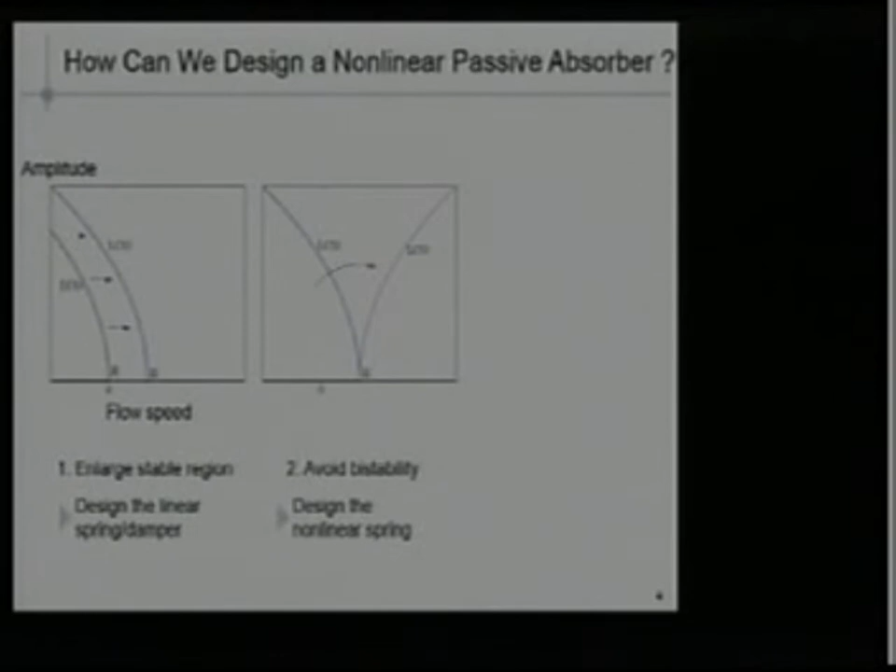And then the last objective of the absorber is to reduce the amplitude of limit cycle oscillation. So even in the case where we are unstable and have this self-excited vibration, we want to keep this vibration small in order not to create too much damage. Unfortunately, with our absorber, we don't have freedom left to target this objective, but I will show that targeting the first two still gives quite a good result with respect to the third one.

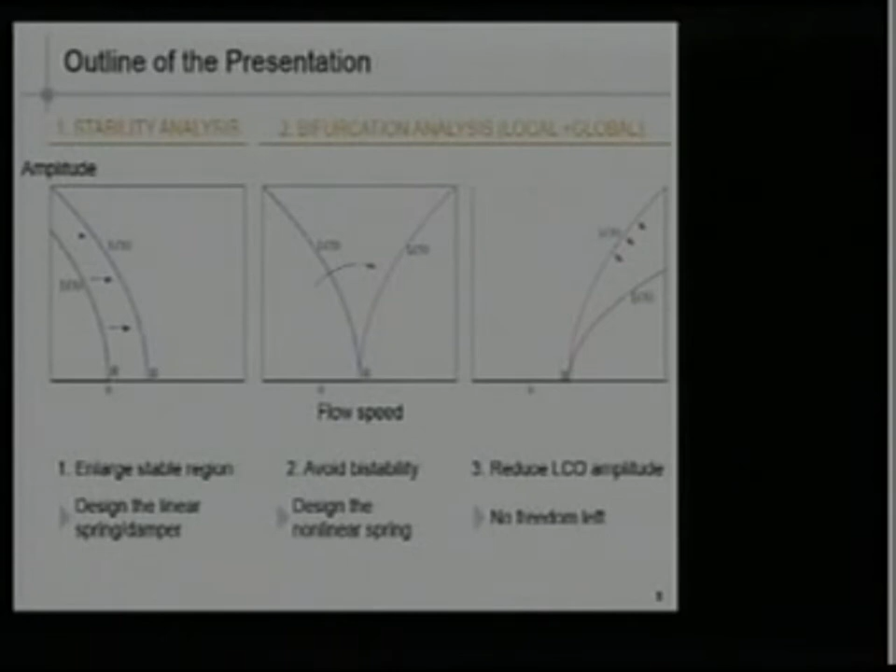So my presentation will go through these three tasks. We start with stability analysis, and then I will go to the bifurcation analysis, making a local and a global investigation.

The primary system we are considering is quite general; we wanted to be as general as possible. So we use a van der Pol-Duffing oscillator. The van der Pol term is related to the instability, the fluid-structure interaction. Here we have a negative linear damping, which causes the rising of the oscillation, while the Duffing term is related to structural nonlinearity, which means that increasing the amplitude of oscillation, the frequency of the oscillation will also change.

And we attach to this system our nonlinear vibration absorber, whose particularity is that the nonlinearity is not specified a priori. So we have three coupling terms. One is related to the linear damping of the absorber, one to the linear stiffness, and this one to the nonlinear stiffness of the absorber, which for the moment is not specified. So we keep it for the moment in this way.

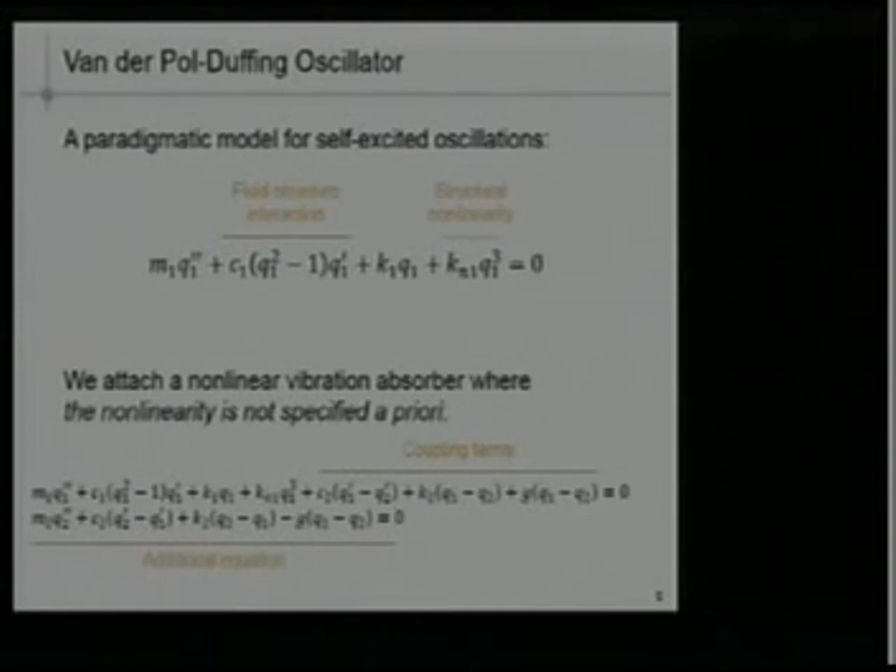And then we go through the linear analysis, which is already known in the literature; the group of L'Aquila has also worked on this. I should acknowledge them.

To define it, we address the principle of similarity, which means that the nonlinearity of the absorber mimics the mathematical form of the nonlinearity in the primary system. So in this case, we have a Duffing oscillator, the Duffing term, which is the structural nonlinearity of the primary system. So we impose that also the absorber has a cubic characteristic as the primary system. And at this point, the only unknown left is the coefficient of the nonlinear stiffness, this Kn2.

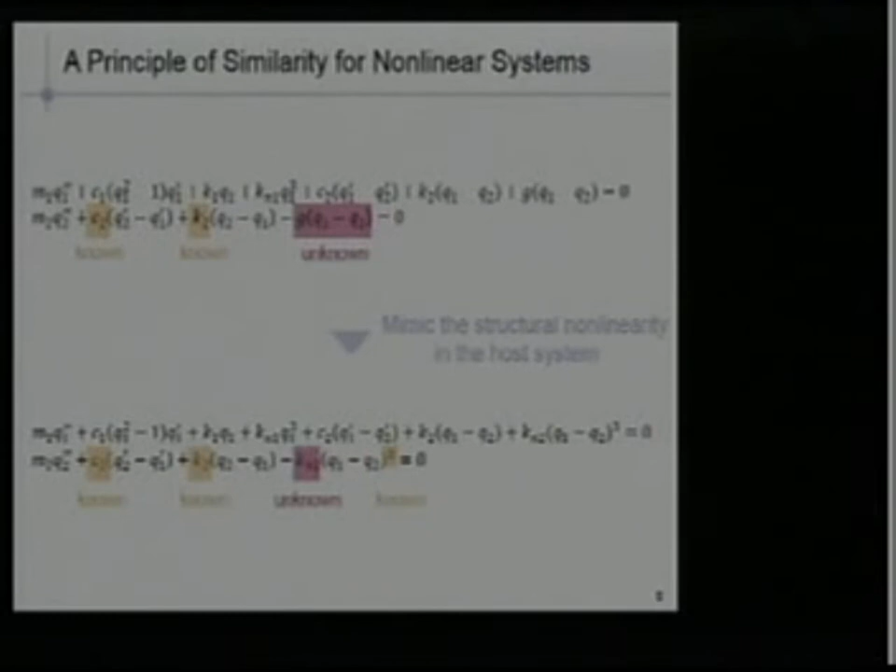To define this parameter, we make a bifurcation analysis. So we analyze the bifurcation occurring at the loss of stability, and in particular, we make a local analysis. So we reduce the system to a model which is valid in the vicinity of the loss of stability. And for this system, the system loses stability in most cases through Hopf bifurcation.

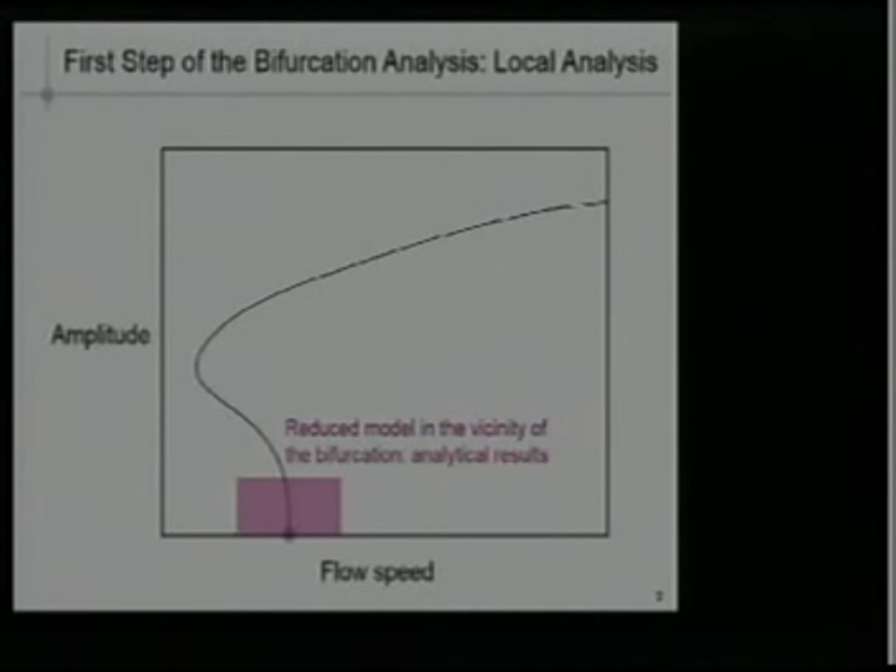So given the primary system, we perform many transformations. I have no time to go into details of this, but we make a Jordan normal form, then mainly a center manifold reduction to reduce the dimension, near identity transformation to eliminate most of nonlinearities, and then we obtain finally an amplitude system going in polar coordinates. So this is an amplitude system, which you see is extremely reduced. This is the normal form of a Hopf bifurcation. And all the bifurcation is characterized by the value of this delta.

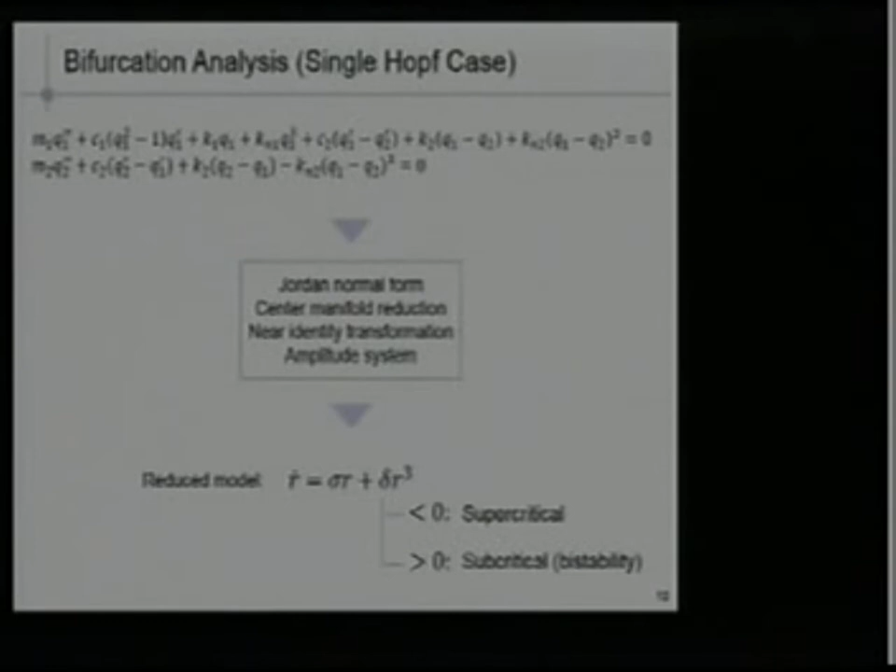If delta is negative, we have a supercritical Hopf bifurcation, while if delta is positive, we have a subcritical bifurcation, which causes bistability. And of course, we want to have a delta negative, because we want to have a supercritical bifurcation at the loss of stability.

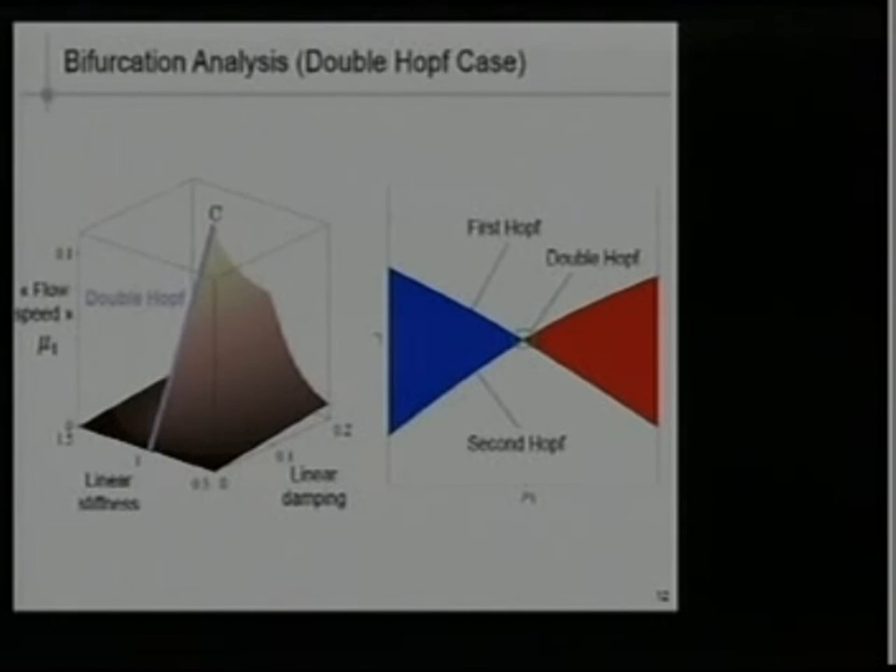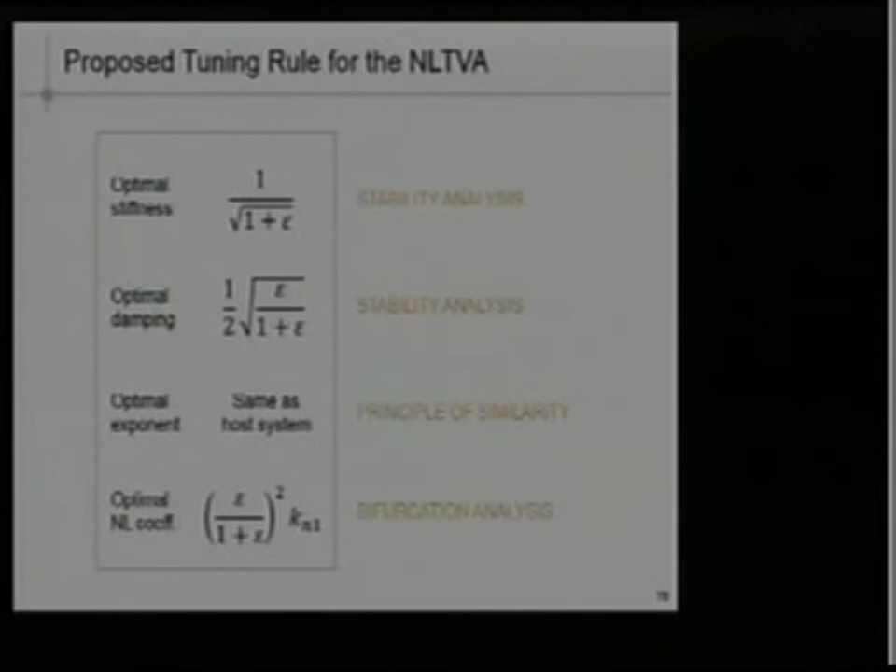So we find the optimal values of the linear stiffness, of the linear damping, and then through the principle of similarity, we define the exponent of the nonlinearity of the absorber. And then we define in closed form the optimal nonlinearity, the optimal coefficient for the nonlinear stiffness of the absorber.

So if now we verify numerically the bifurcation diagrams, you see in black the bifurcation diagram in the case of no structural nonlinearities. So as I mentioned, here we have a supercritical Hopf bifurcation, which is the favorable case. Then we introduce a nonlinearity in the primary system, and we see how this branch of periodic solutions bends to the left, and we have subcritical bifurcation, which also has bistability. But if we add nonlinearity also in the absorber, according to the tuning rule, we can bend this branch again to the right and retrieve the supercritical behavior through adding this absorber.

And another interesting result is the compensation. So we can see that the blue curve and the black one are really close to each other. So it means that even though, as I mentioned, the compensation is not exact in the case of the single Hopf, so we impose a slight detuning with respect to the exact solution, still we have this compensation with quite good agreement.

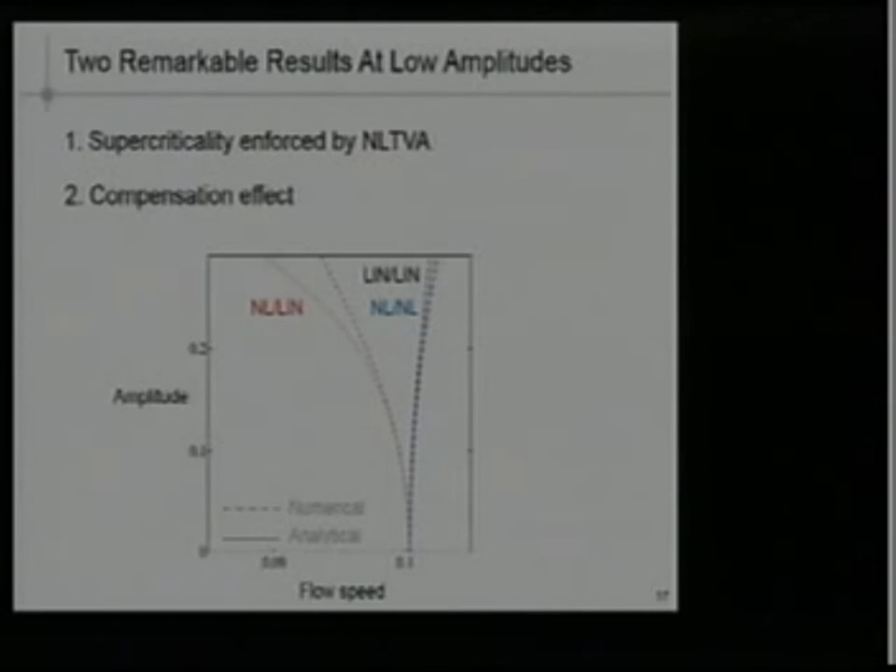So this is only the local picture of the bifurcation. But then we went to higher amplitudes. This is only numerical result; the analytical ones were only local. And also in this case, you can see how in the structurally linear system we have this nice supercritical behavior, while the nonlinearity in the primary system is giving this subcriticality, and adding another nonlinearity also in the absorber, we can retrieve this supercritical behavior and have the compensation. And this is obtained considering a small detuning of the linear spring, so slightly less than the optimal values.

But if we do the same for a linear spring of the absorber which is slightly larger than the optimal values, as I mentioned, the nonlinearity of the primary system in this case has an opposite effect. So in this case, the nonlinearity in the primary system is helping to have supercriticality. So this is already supercritical. But still, at higher amplitude, the detrimental behavior, the bistability, is still there due to this folding of the branch. And also in this case, the nonlinearity in the absorber is succeeding in avoiding this dangerous scenario. And also in this case, we have quite good compensation of the two nonlinearities.

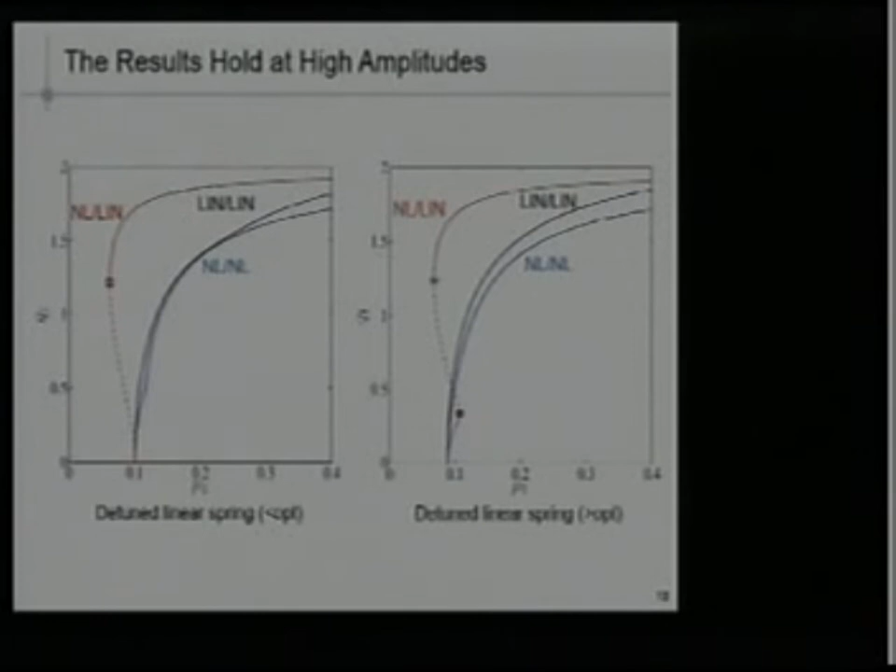So this, I think, really shows the meaning of why you should use the principle of similarity, because we can have a compensation that works in the same way as in the primary system for different amplitudes. So the effect of the nonlinearities increases its importance in the same way for the primary system and for the absorber for increasing amplitude, which we don't have if we have two different nonlinearities in the system.

So to conclude, we presented a nonlinear absorber that has a nonlinearity not specified a priori, which gives additional flexibility, and we address the principle of similarity to define it. Then we made a full analytical design for a van der Pol-Duffing oscillator system, which is quite an archetypal system. And we show how this nonlinear tuned vibration absorber combines the strength of a linear absorber, which is able to push the loss of stability to higher values of the bifurcation parameter, but we also obtain a positive effect in terms of control of the bifurcation, which is something that the nonlinear energy sink can do. So we combine these two effects.

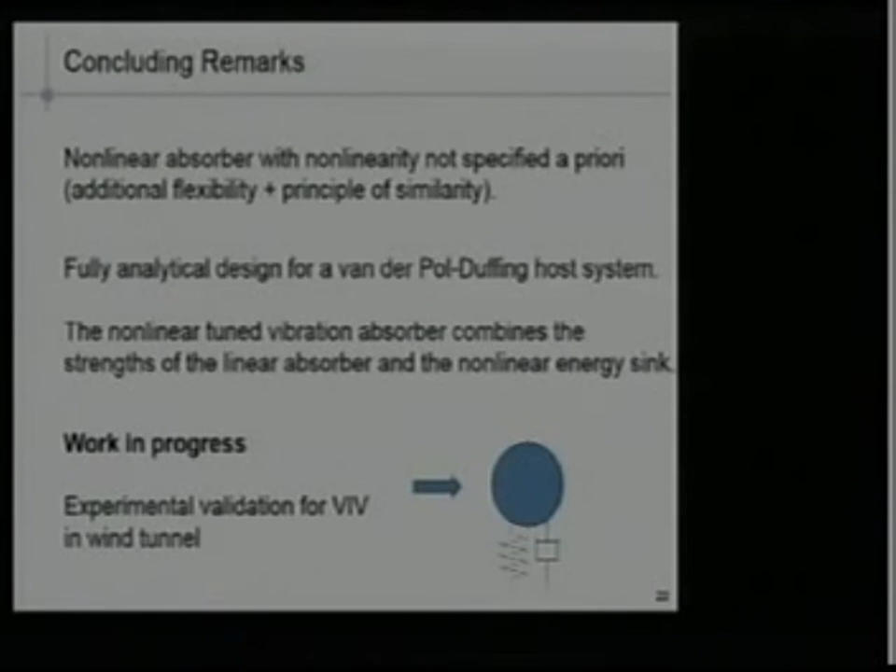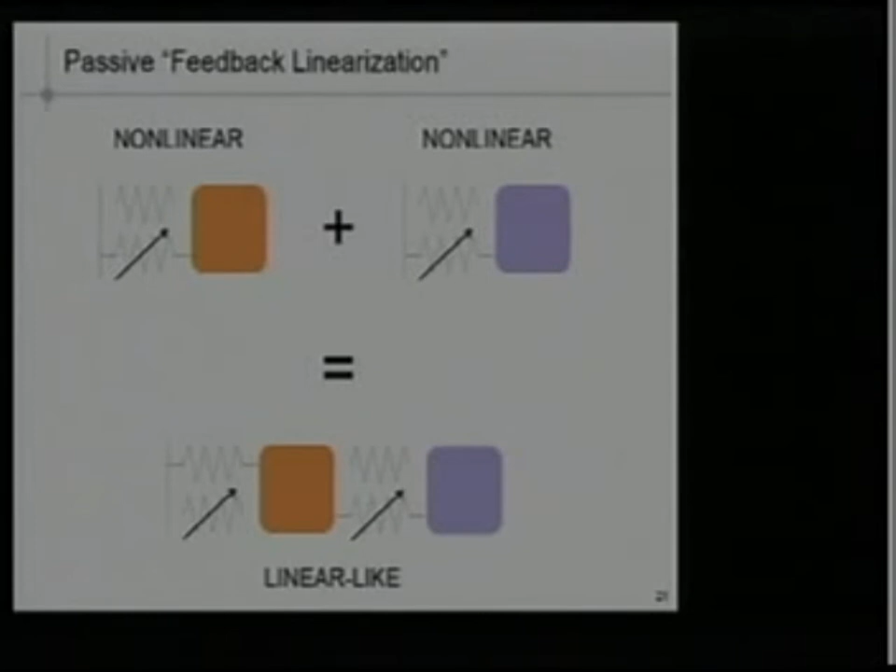A work in progress is experimental validation of this effect, which will be done considering vortex-induced vibration on a horizontal cylinder in a wind tunnel. Another aspect that we are further investigating is this sort of passive feedback linearization that we found during our analysis. Thank you.

It's known that with bifurcation control, the first one, we can change from subcritical to supercritical just by introducing a nonlinearity without the mass. By putting the absorber with the mass in, the problem got so complicated that you have the double Hopf bifurcation and all the other complications. But if you use only a nonlinear spring, which will compensate whether it's quadratic or cubic nonlinearity, you can change the bifurcation from subcritical to supercritical so that you don't need the mass absorber. Mm-hmm.

So you mean that basically with the bifurcation we have similar things, but you put the nonlinearity. Let's go back to the van der Pol, the original one. Yeah, so just add a nonlinear spring in the system, or nonlinearity in the system, compensate for that cubic, and that's done, and the bifurcation will change. So for the airfoil and for flutter and so on, you don't need the mass with the complication; if you have a wing and you add a mass, you add the double Hopf bifurcation. Just put a spring nonlinearity or feedback nonlinearity on the basic system. I agree that if we add the nonlinearity here, we can control the bifurcation for sure.

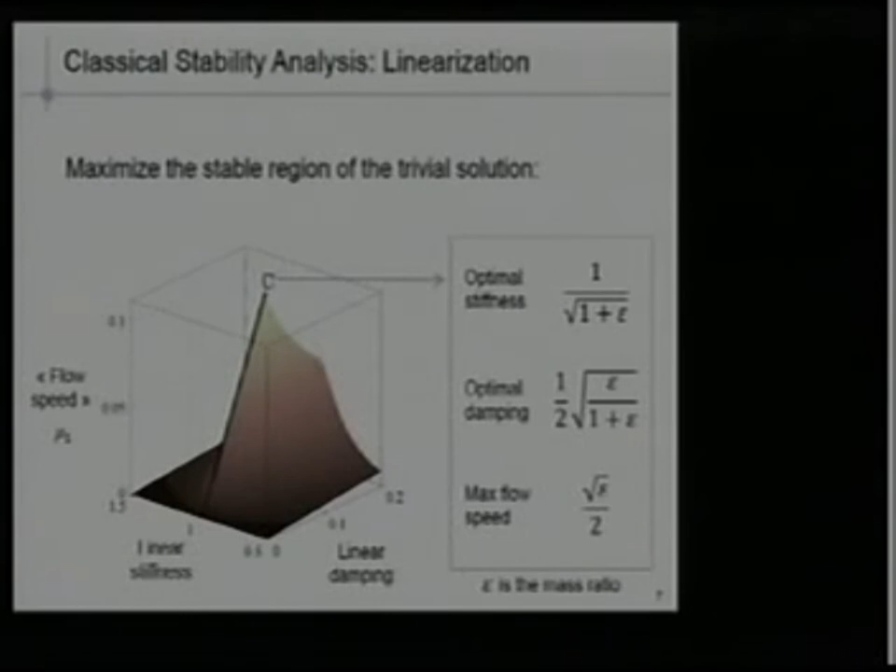And the other thing, I thought the idea of a nonlinear energy sink is to be able to respond to any frequency, control any frequency. But when you put the linear part, you're controlling one frequency now. So what's the advantage of what you're doing? Thank you for the question. I really want to show this.

Okay, I show you the maximum you can do with a linear absorber. So this is a different perspective. Still this is the bifurcation parameter, and this is the maximum we can obtain only with a linear absorber. And instead, if we use a nonlinear energy sink, so we don't have a linear spring, basically we have this. So we lose stability here, which is the square of the value we have here. I mean, mu1 is 0.1, so the square of 0.1 is something like that.

So I think the use of the linear spring is critical, in my opinion. If we don't use a linear spring, we can play with the bifurcation, but we really cannot play with improving the linear stability of the system.

I hope you'll get a chance to see them. Yes, for sure. It'd be nice. Thank you. Any other quick question? Yes, please.

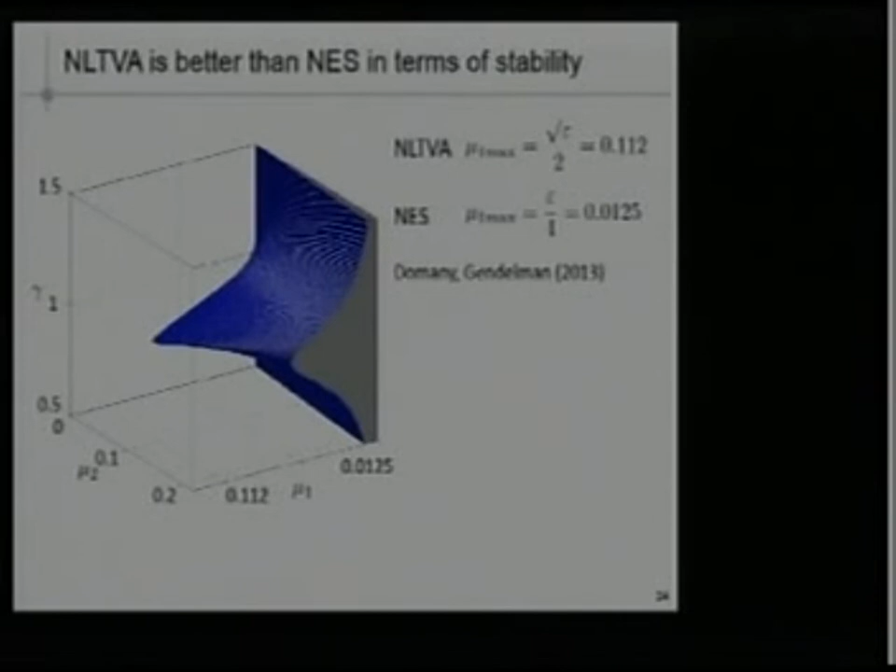Short question. Could you explain what parameter defines the flow speed? You mentioned flow speed; what is it in your original equation? Yes. So in the original equation, C1 will be adimensionalized, and it's C1 basically. And I called it mu1 because I made some, yeah, van der Pol, yes.

This is basically a wake oscillator what you have. With the wake oscillator, you don't model the flow. You just assume a distributed van der Pol there, which is far from true. Because we try to calibrate, and you really have flows. It's only good when you have a laminar flow. Once you go to turbulence, you're gone, basically. So if you're thinking about a realistic model, van der Pol probably is not the best.

I agree. If we consider flow-induced vibration, we have a different phenomenology. We don't have a Hopf bifurcation. We have a codimension-two bifurcation, different from van der Pol. We have a couple of exactly zero eigenvalues at the loss of stability in the case of flow-induced vibration, and it's a sort of resonance that we have with the wake, with the cylinder. So it's a different phenomenology, and this bifurcation analysis won't work in that case.

I made some numerical investigation considering parameters similar to this one, and the correct tuning is not really necessary; quite similar tuning is still working very well. It's a work in progress, but we were able to almost eliminate the resonance on the cylinder in the case of a linear cylinder with a linear absorber. Introducing a nonlinearity in the structural system, the linear absorber was having some problems, so we had some isolas of instability, and the nonlinearity in the absorber was able to eliminate those isolas. I'm sorry I don't have figures to show you this result, but thank you for the question.